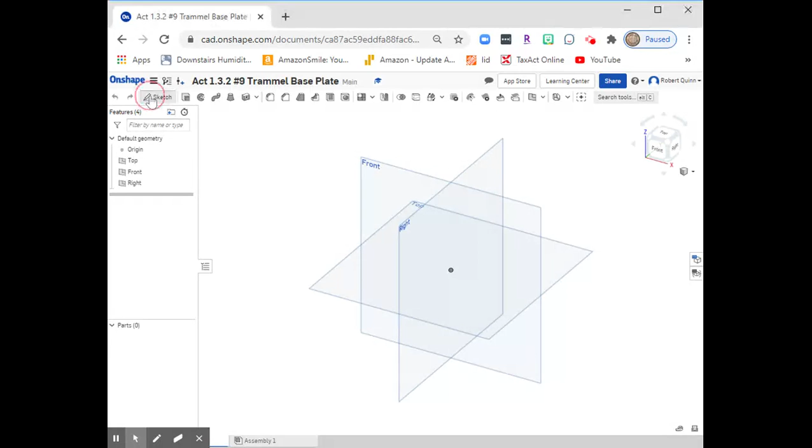First I'll make a new sketch and put it on the front. I'm going to make a rectangle to represent our Trammel base plate. It's 4¼ inches tall, so I'll dimension the height as 4.25. It's also 4¼ inches wide, so it's square.

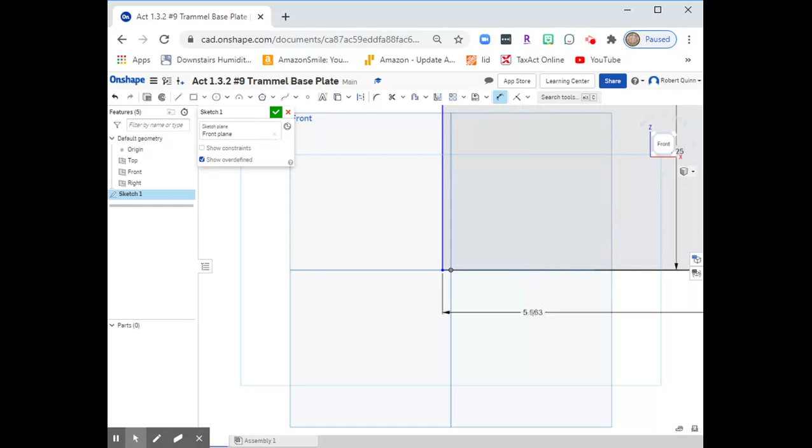There's a square in the middle of it. Let me remove the square. The square is 0.406 inches from the left edge, and it's 1¼ inches wide and 1¼ inches tall. It's also 0.406 from this edge.

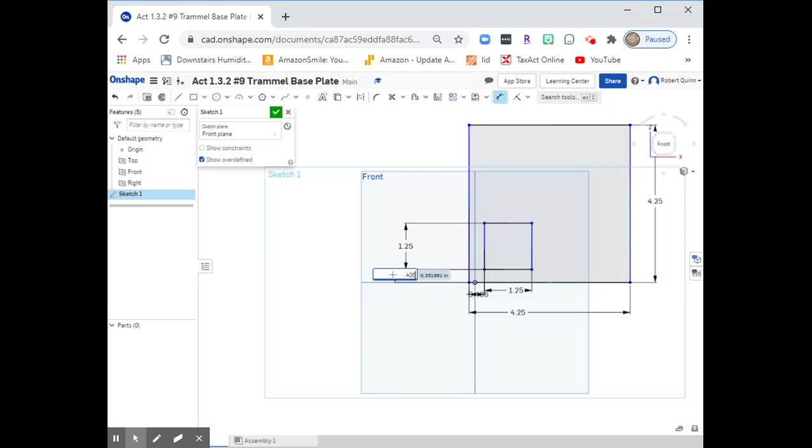There's a notch cut out of the top right, so let me draw that rectangle. The notch is 1.75 inches wide. That dimension was missing in the initial assignment, but I've added it in the update. It's 0.5 inches tall, and from here to the bottom is 3.25 inches.

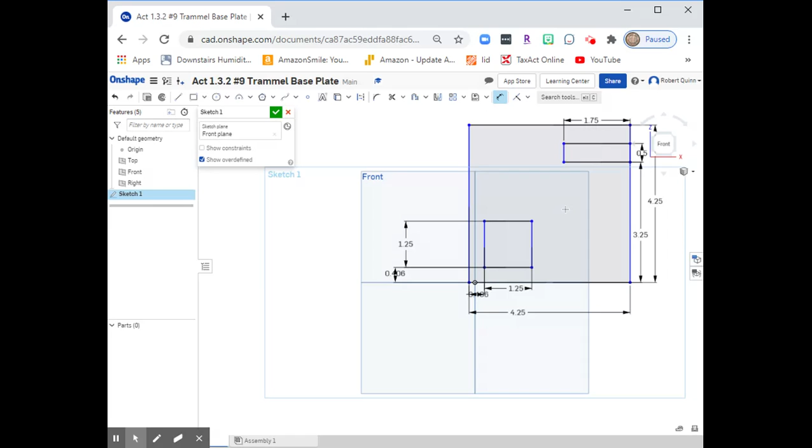Okay, so there's my Trammel toy base. I'm done with my sketch. Now let me go ahead and extrude everything other than those two rectangles, and it's going to be 0.24 inches wide. There's my Trammel toy base.

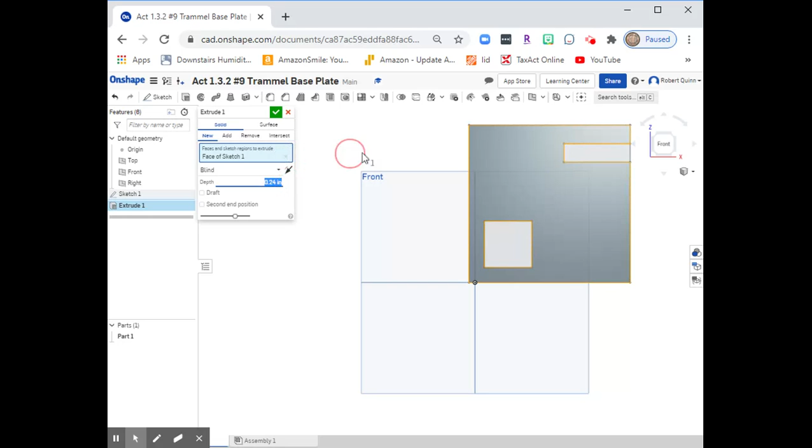Next we're going to make all of the holes. There are a number of different holes, and many of them are different sizes than others. So let me make a new sketch on the front face and make points. There are 4 holes at the top left and 4 points at the bottom right.

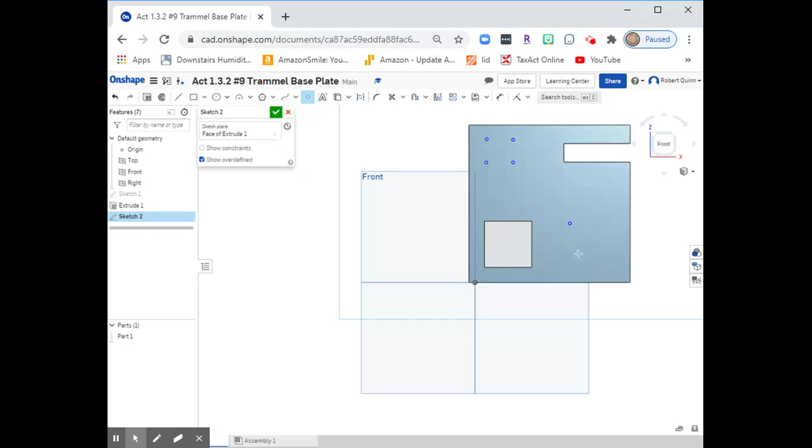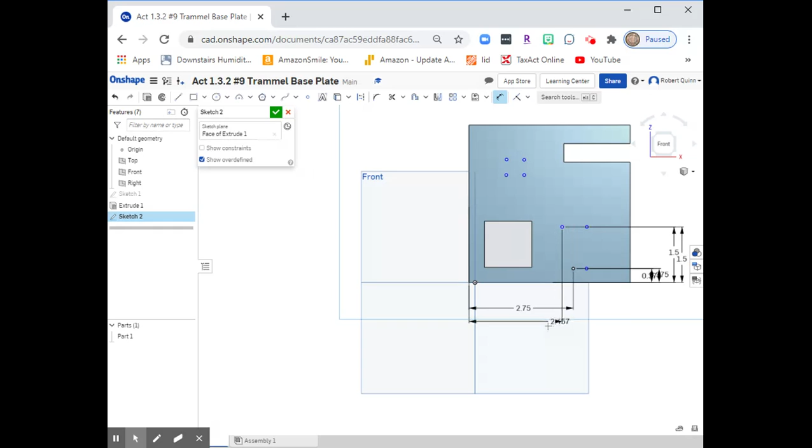Time to dimension. Each of the holes is 0.375 inches from the bottom. These two are 1.5 inches from the bottom. From the left edge, the leftmost ones are 2.75 inches, and the rightmost ones are 3.875 inches.

Okay, so we've set up those 4 holes. Now, the holes at the top - some of these were missing in the initial drawing, but I've added them. The ones on the left are 0.375 inches from the left edge. The ones on the right are 1.5 inches from the left side. And the ones on the top are 3.875 inches from the bottom; I have to go back and fix this one - 3.875. Lower ones are 2.75 inches from the bottom.

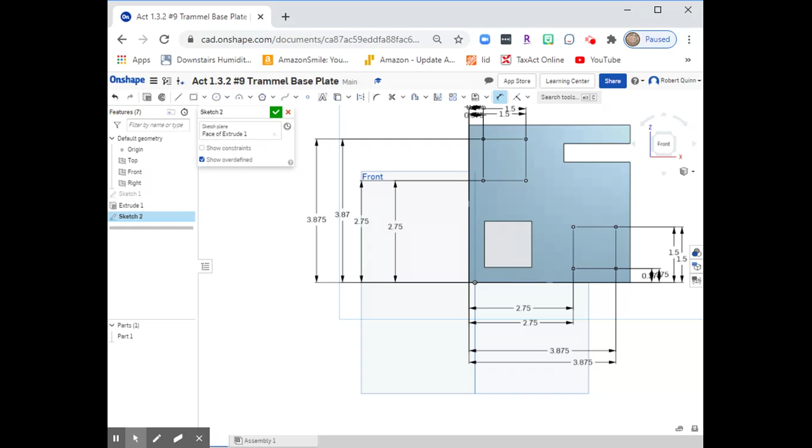Now I need to go ahead and make the individual holes. Let me first finish my sketch. Now I'm going to click on hole. The holes are not counterbores, they're simple holes, and they are through holes.

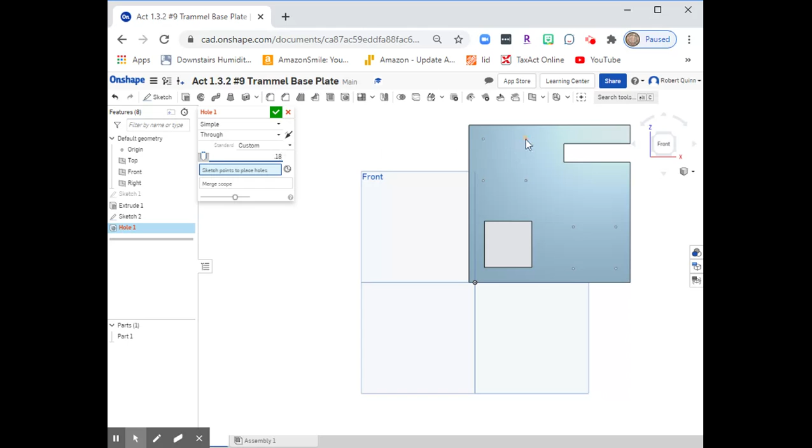My first hole is going to be 0.18 inches, and that's this one. I'll select multiple ones - this one, and also this one, and this one, and this one. Sorry, I don't want to hold down the Control button - notice it's choosing all 4 vertices. Let me double check. Those 4 look like they're good. Okay, that one's done.

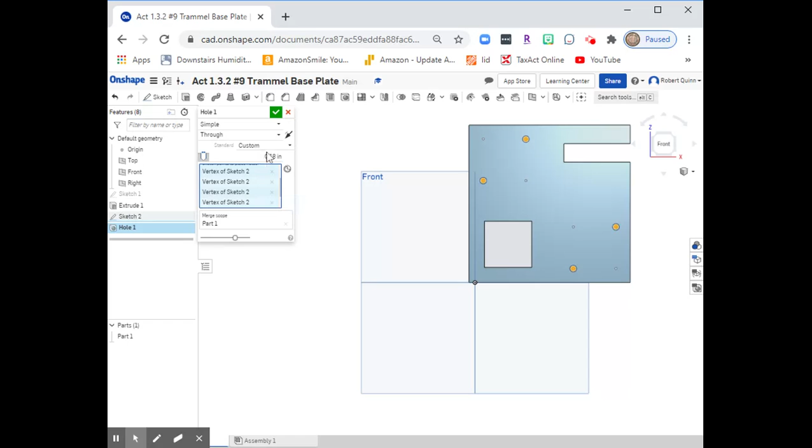Now I can't see those other points. So what I need to do is go to my sketch 2 and click on the eyeball to show sketch 2. Now I can see the other ones.

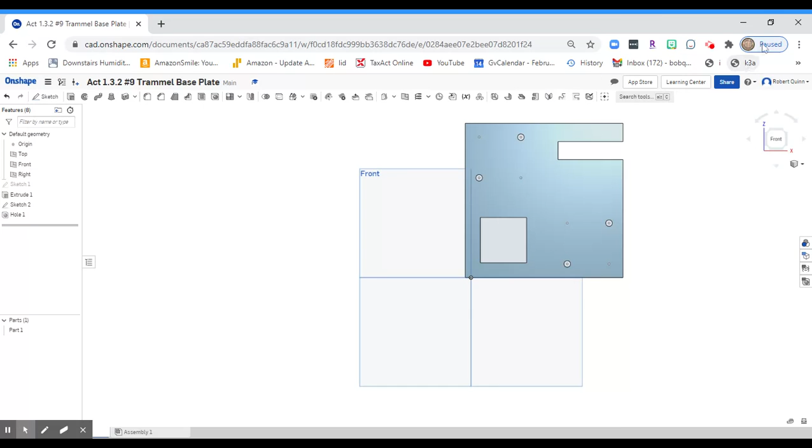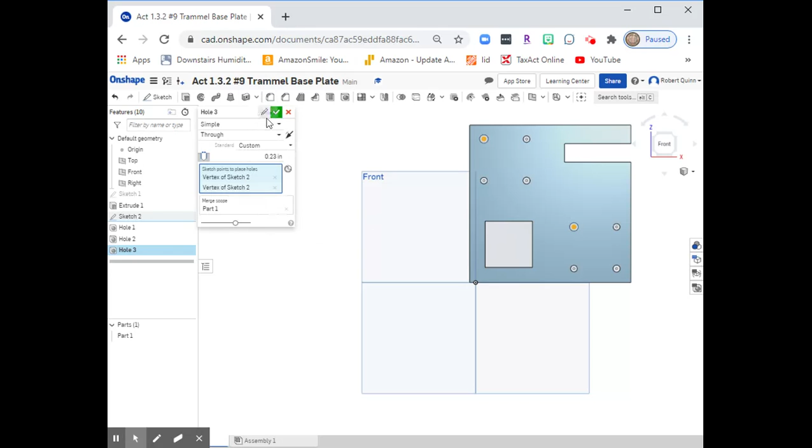Now I will click on hole, and my next hole is 0.19, which is going to be bottom right and bottom right. That one's done. And the last 2 holes are going to be 0.23, which is top left and top left. Okay, there we go. There's the Trammel base plate.